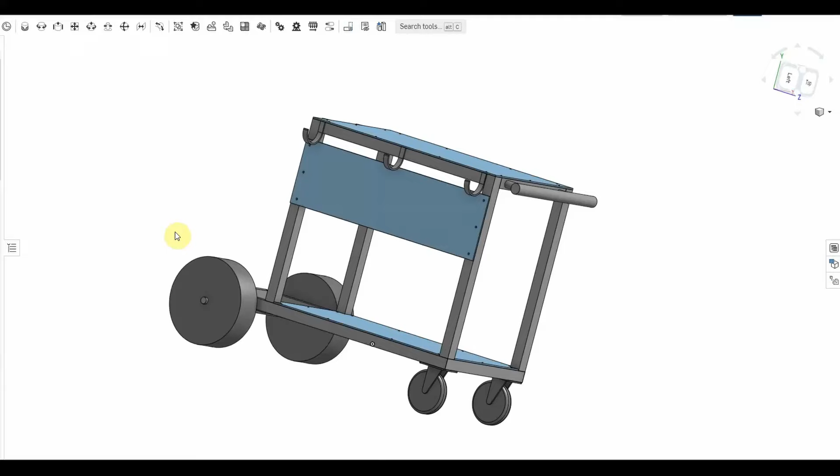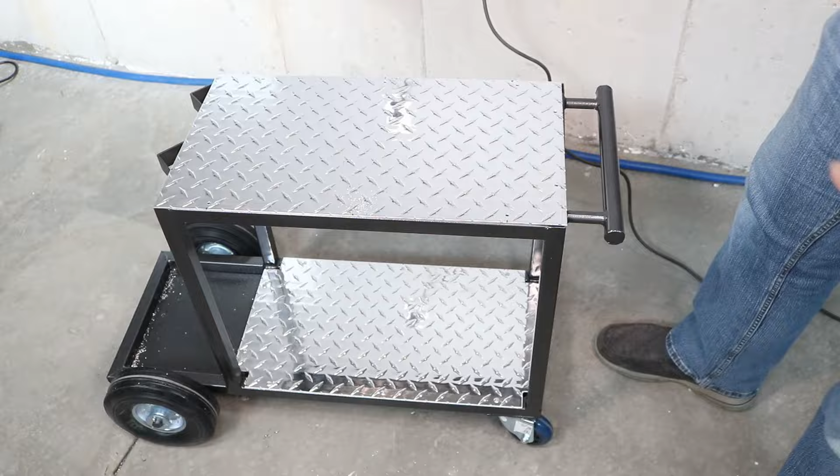Today I'm going to show you how I built this welding cart, and I'm going to give you a set of plans so you can go ahead and build your own. The plans will be embedded right into the video, so look for them to pop up as we go along. You can refer back here or take screenshots so you have the information you need when you need it.

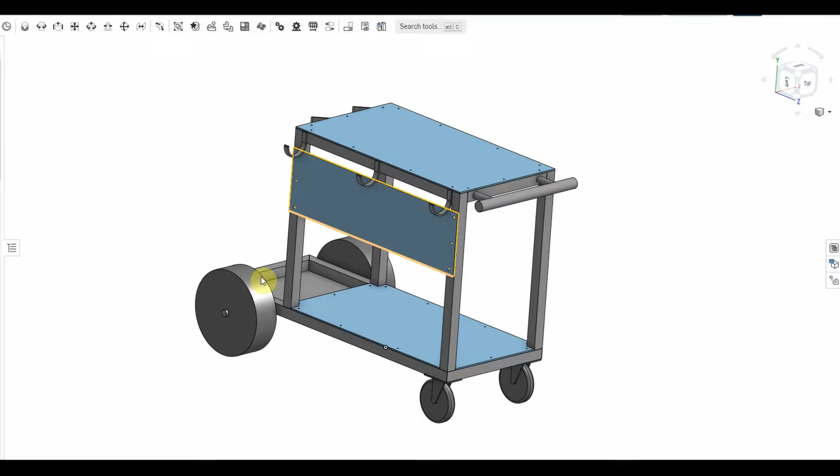Before I started the build, I went into Onshape and I modeled the whole thing up virtually so I'd know exactly how it would turn out when I'm finished and exactly what to buy. From that, I got this bill of materials that you can see here. There's a column for the material description, what size you need, and what it's used for in the build. So this can be your roadmap through the entire build. Feel free to modify it if you need to.

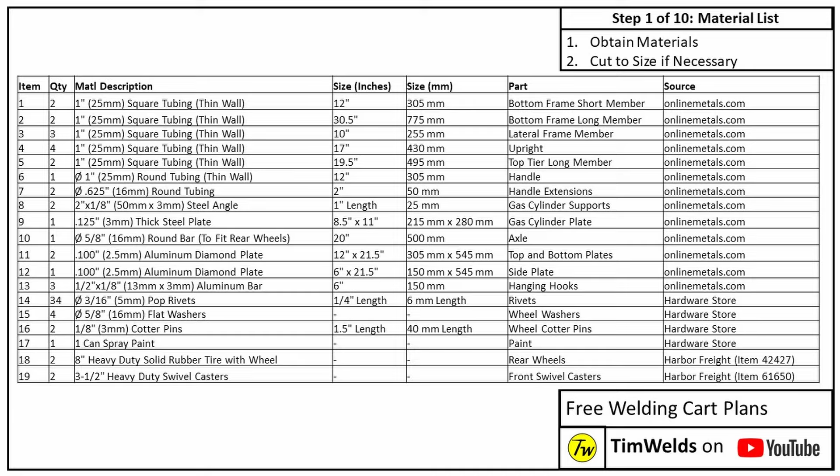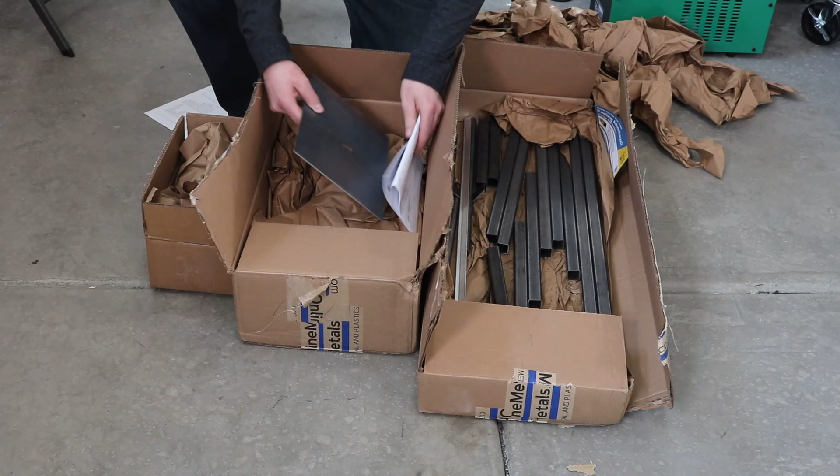Then all of the steel and aluminum, I just got on Online Metals and entered this bill of material right in, put everything in my shopping cart and clicked order. I ordered everything cut to length and it showed up 3 days later in boxes. It was so handy to not have to run to the steel yard and buy too much of each thing. I could just get the right amount. It was like my own personal kit.

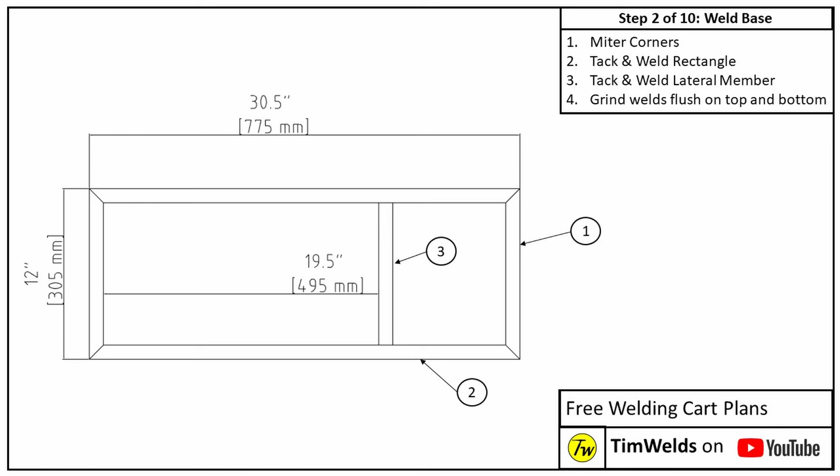Once I got all the materials, I was ready to get started with the build. The first step was to weld this bottom rectangle, and I did that by mitering the corners at 45 degrees with my bandsaw, and laying that out on the fixture table. Once I had it laid out, parallel and square, I tacked it really solid in 4 places to reduce distortion and weld it out.

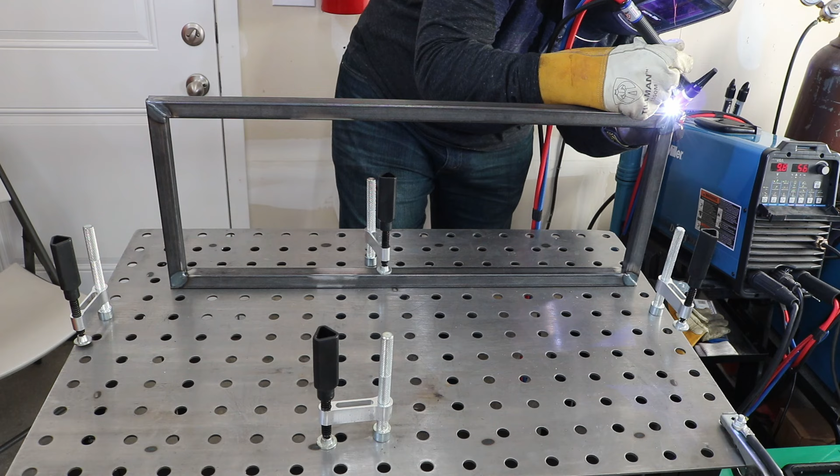One quick tip to reduce distortion is to weld the inside fillet last, because that will pull more than anything else. So if you get everything locked in place before you weld that inside fillet weld, then it'll hold a little bit more square. So once everything was welded, there's one member to put in place.

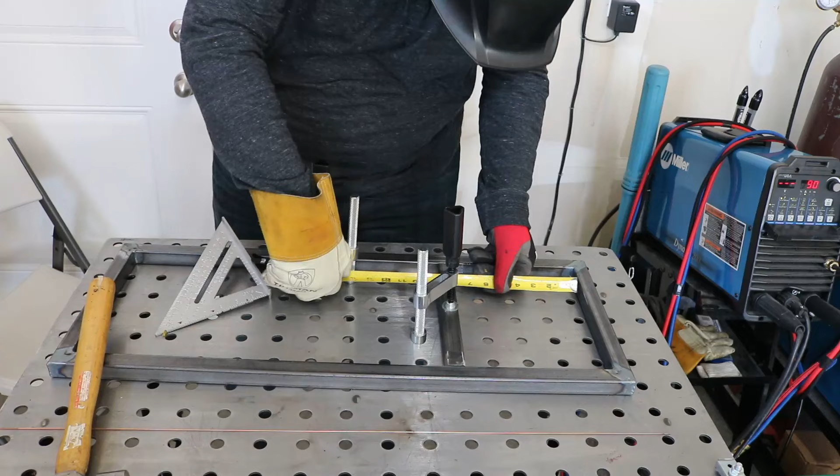This sits right in front of the gas cylinder in that rectangle, so I got that tacked and welded in place, and then cleaned those welds up a little bit with a grinder so that things could sit flush on top of them.

Next, I took these uprights and I set them in place, and I just used the runners that fit right here front to back. I just set them in place next to the uprights here in the bottom to space them out, to make sure I got my spacing right. That worked out perfectly, so I got the uprights tacked just loosely in place.

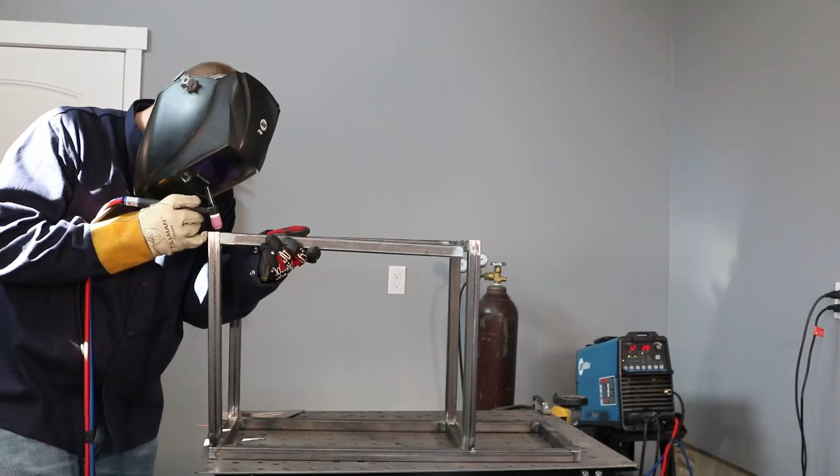Then I tacked these runners on the top that go front to back and side to side. I got all of them tacked in place, just loosely, so I could make any adjustments I needed to, or even if I needed to pull a piece of material out to trim its length or something, it would be easy. I didn't end up having to do that, but I did move it around a little bit to get everything square. Then I added some more tack, so I had a tack at every corner of every piece. Once it was all tacked in place, I went ahead and welded it out.

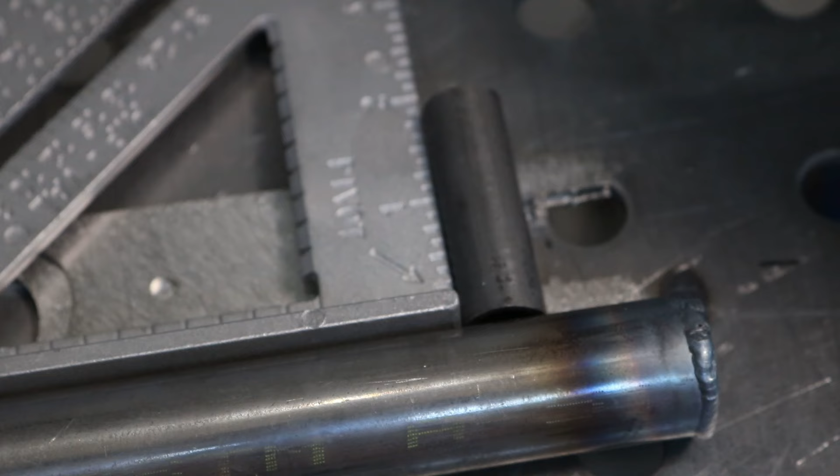Next, let's talk about making the handle. So the handle's made out of 1-inch round tubing, and I capped both ends just with some spare sheet metal that I cut in a circle and welded around. Then I took the 5/8 inch tube, cut to 2 inches long, and tacked it centered into the round tubing here.

In order to do that, I just set that round tubing on my bench and put a shim underneath this 5/8 inch tubing, and tacked it up in a couple of places, pulled it off and welded it around. So then I took that whole handle assembly, set it up to the cart itself, and welded it in place.

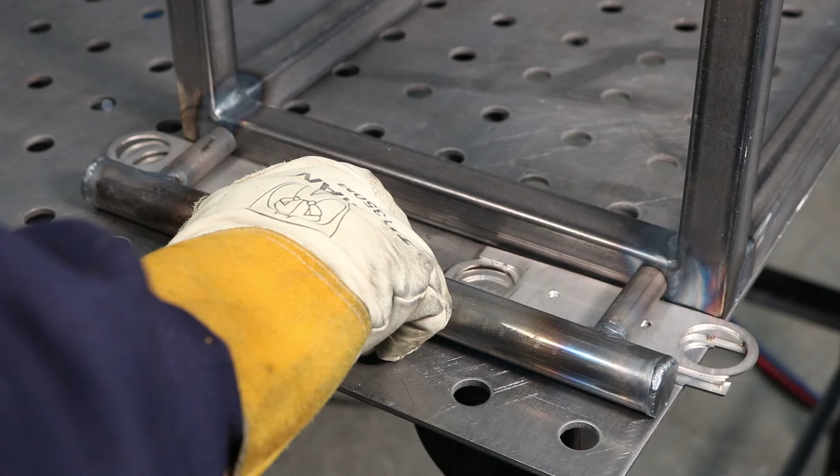So we're done with the handle. Next, let's move on to the heavy gauge shelf for the gas cylinder. If you flip the cart over on the table, you can set that heavy gauge plate in place and center it up, and then lay down some weld.

Instead of welding all the way around this, I just put 1-inch welds spaced evenly in 3 places on each side. I figure that's plenty to hold it in place because it's going to have the axle sitting right underneath it to support all the weight from that cylinder.

Once that was set in place, it was time to move on to putting on the rear wheels and axles. I ordered the axle a little bit long on purpose because I didn't know exactly how the wheels would sit, so I wanted to trim it to length.

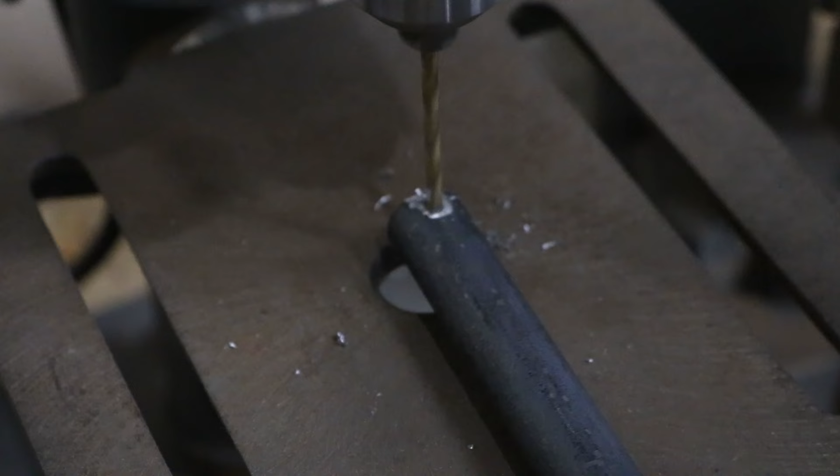I got the axle set up, put a washer on the inside and outside of each wheel, and left a 1/4 inch hanging out of each side and marked it for a cut. I cut it to length, then ground a little bit flat on each side to make it easier to drill a hole on the drill press. Then I drilled a hole to match the cotter pin, about 1/8 of an inch in from the end on each side.

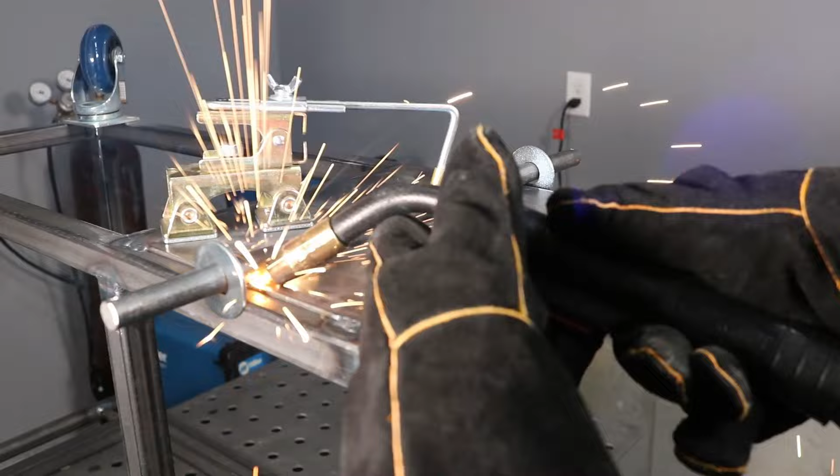Once that was done, I could go ahead and set the axle in place, center it under the gas cylinder, center it side to side, and tack it in place. Now I'm moving from the TIG welder to the MIG welder here, just for convenience in welding this in place.

Next, I went ahead and welded a washer on the inside of each wheel. I did this just so the wheels wouldn't bind up or get stuck side to side, and they'd have a nice bearing surface to rest on.

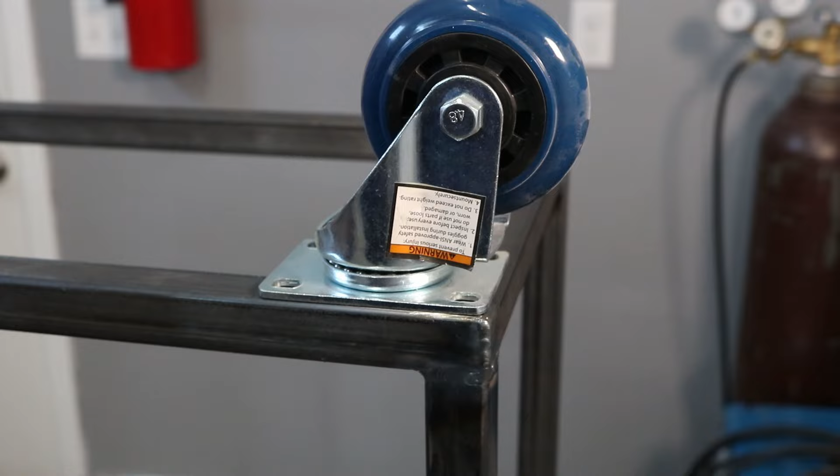Now moving on to the front casters. For the front casters, I welded them with the MIG welder also, but for a different reason. I didn't put plates to mount the casters to—I went ahead and welded the casters right to the frame.

The casters are galvanized, and you can clean some of that galvanized material off, but you can't really get rid of all of it. It's pretty hard, so you don't want to breathe the fume from welding galvanized material—it can be pretty bad for you. So I like to MIG weld it, one, because it goes a little better, and two, because you're done faster, so there's less opportunity to have that fume from the galvanized metal in the air.

So I MIG welded those also, and that worked out pretty well, just running a stringer bead along there. I had the running gear pretty much set.

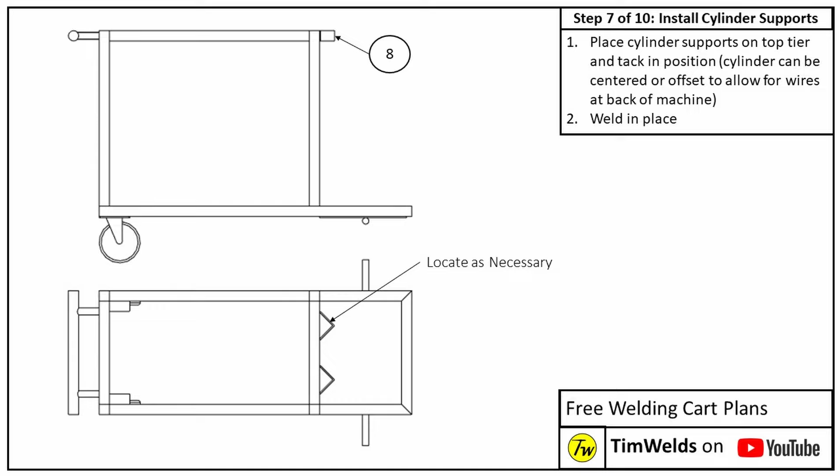Next, it was time to make the mounts for the cylinder. These are just 1-inch long pieces of angle iron, and I set the gas cylinder right in place so I could put the mounts right up next to them and get a nice tack on them before pulling the gas cylinder off and welding them out.

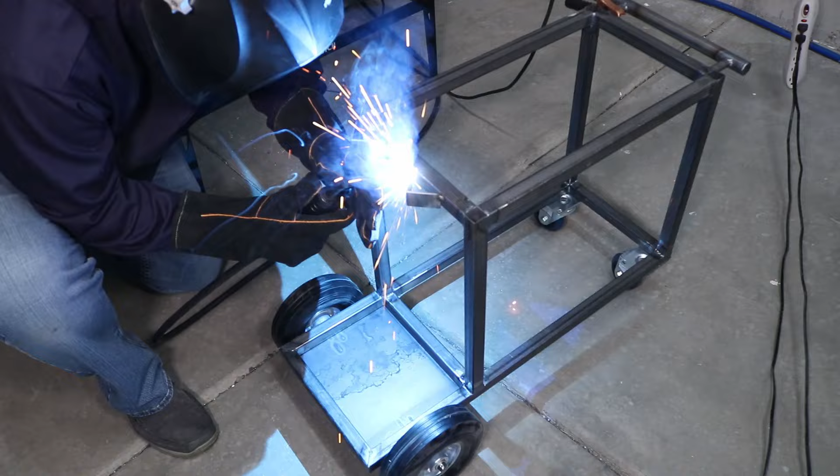That gives a nice cradle for the cylinder to rest inside of when it's sitting on the cart. I'm also using those as hooks to be able to attach the cylinder with a tie down. And it's time to move on to paint.

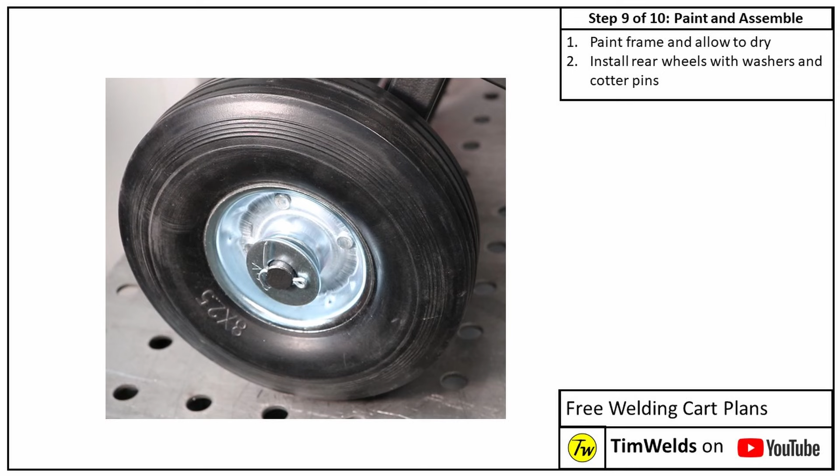So a little bit of masking, and I sprayed on some hammered paint because I like that style finish, but you could use whatever you like to paint the frame.

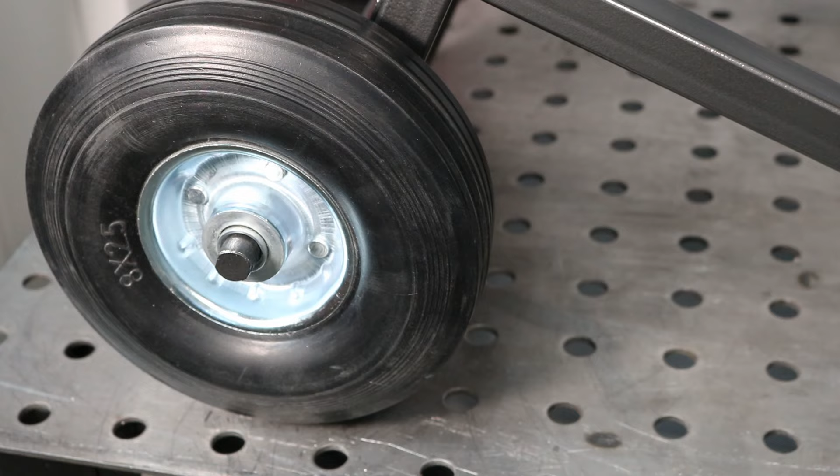After the paint was dry, it was time to go ahead and put on the wheels. I slid the rear wheels on, put a washer on the outside and the cotter pin through, and bent it to retain those. Then I took the top shelf, drilled holes around it evenly spaced, so I have 2 on the front and back, and 3 on each side.

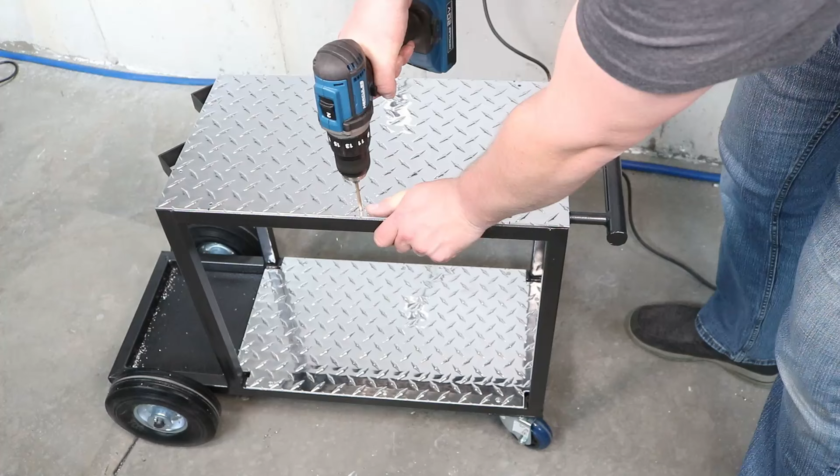Then I match drilled holes in the frame and put pop rivets in to hold it in place. I did the same thing with the bottom shelf, except I had to notch a corner out on the bandsaw, notching out about 1.25 inches for clearance for the weld around this tubing. If you went right up tight to the tubing, it wouldn't sit flush because there's a fillet weld inside there. I got those notched out and riveted in place.

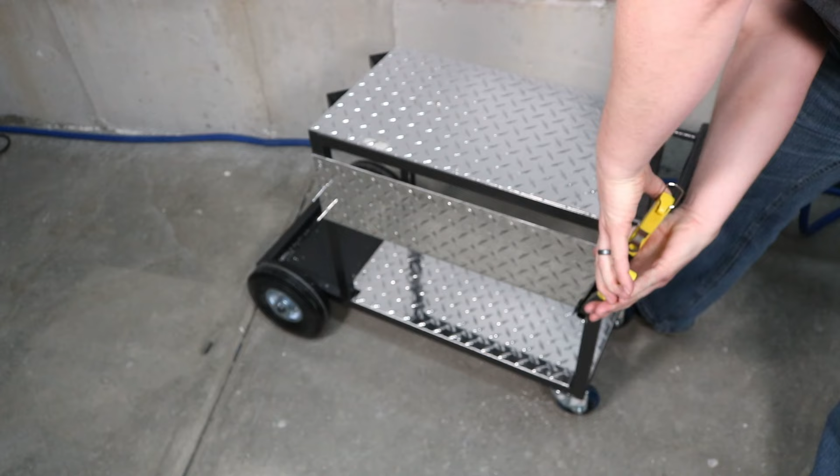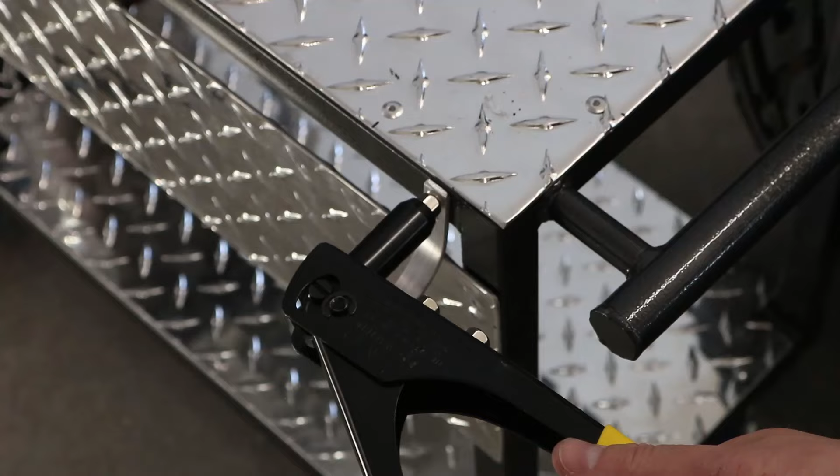This side panel has 3 pop rivets, and that holds that. For these hooks, I took a piece of aluminum flat bar, used some vice grips to clamp it to a large socket, then used a ratchet on that to crank it around to hold it in place. Once those were bent around, it was just a little bit of trimming. I drilled a couple holes and was ready to rivet those right in place.

That was the last finishing touch to put on the cart. So let's go ahead and put this machine on here and see how it looks. Okay, so I got it all loaded up—my cylinder and welder, the water cooler, torch, ground clamp, foot pedal, everything in its place.

So I'm super happy with how it turned out. Everything rolls around great. I just used a tie down to hold the cylinder to those angle brackets that we put on. You could drill and tap some holes to bolt some chain on if you want, but I like how I can pull the tie down nice and snug to hold it in place.